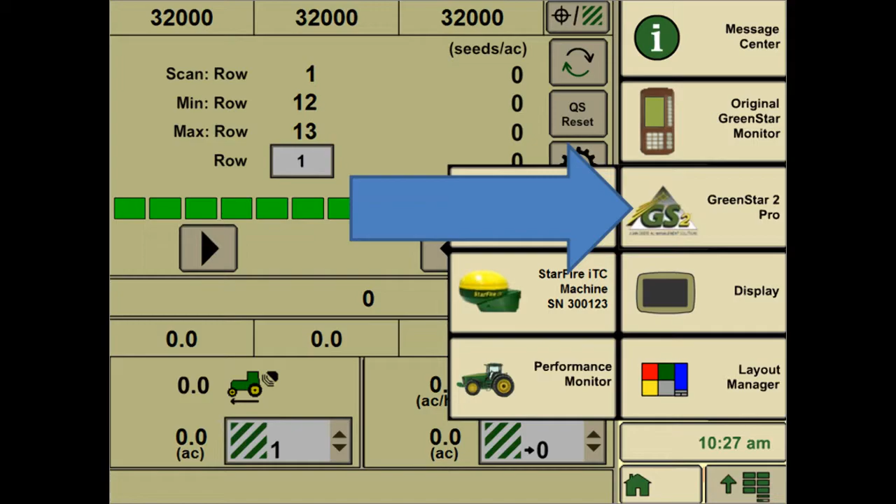Once the TCM calibration is completed, then we can go into the equipment setup, which is going to be going from the main menu into the GS2 or GS3. And then we're going to select the equipment tab on the right hand side. On the left hand side of our screen we can see machine type, model, and name will now appear. We want to make sure that we enter that information in correctly, and it'll also be there for the next time we put this receiver and display back in this machine.

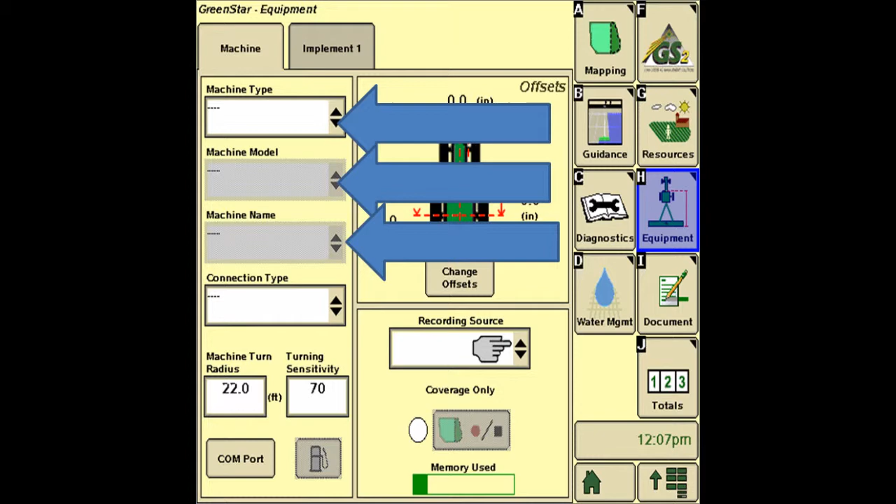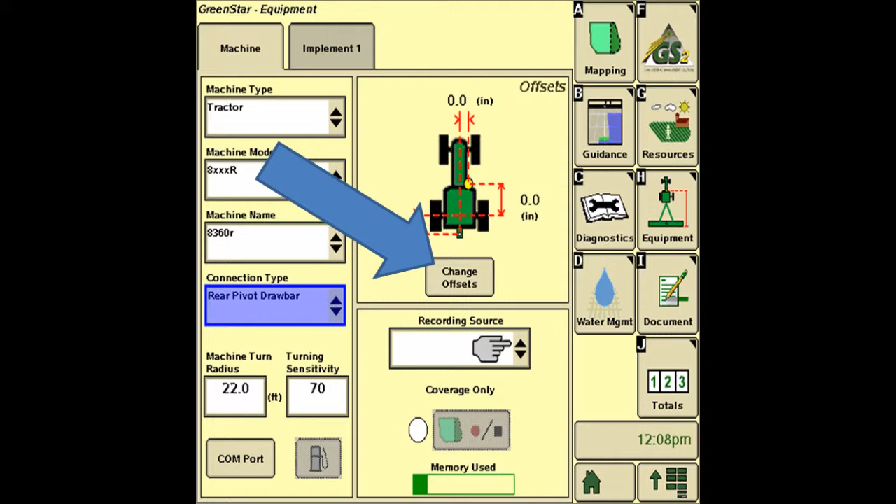We also want to verify that our connection type is going to be representative of the implement that we're going to be hooking onto. If we make changes to the connection type, we'll see our diagram change to represent the option that we selected. Next, if we select the Change Offsets button, it'll bring us into a page that has a diagram of the machine type as well as a diagram of where measurements should be made. They also have description on the bottom that helps illustrate where the measurement should start and end.

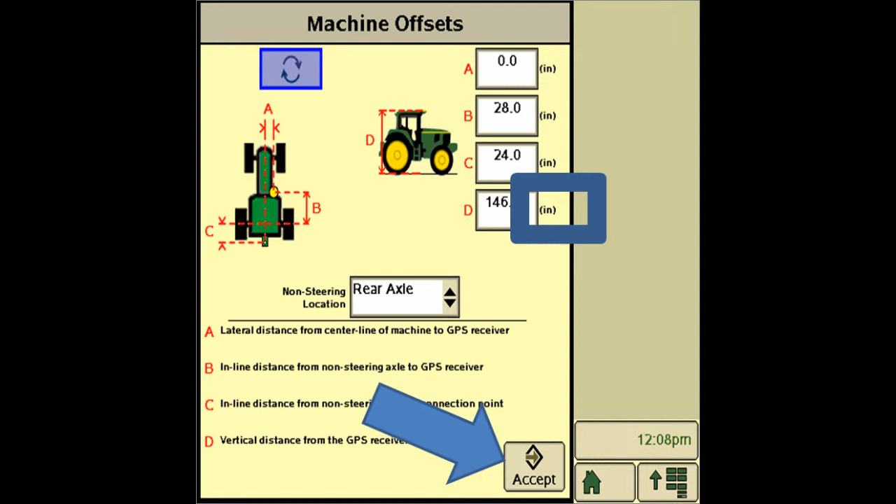One thing to note is that under the machine measurements, it's all going to be in inches, and it'll be different on the implement. We want to make sure that we have the correct units when we're making our measurements. We will also notice that measurement D is going to be the same number that was measured for the TCM calibration. We can then hit accept, and we can now see that those measurements are now put in that picture diagram that's under the machine tab.

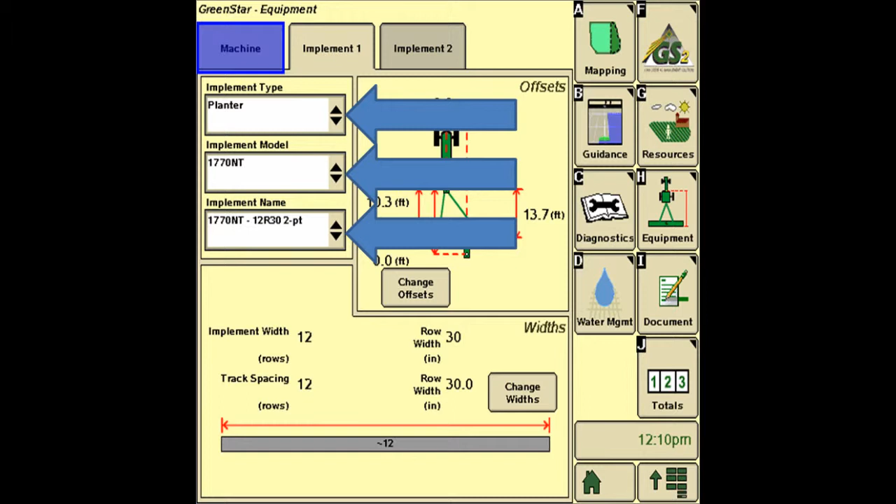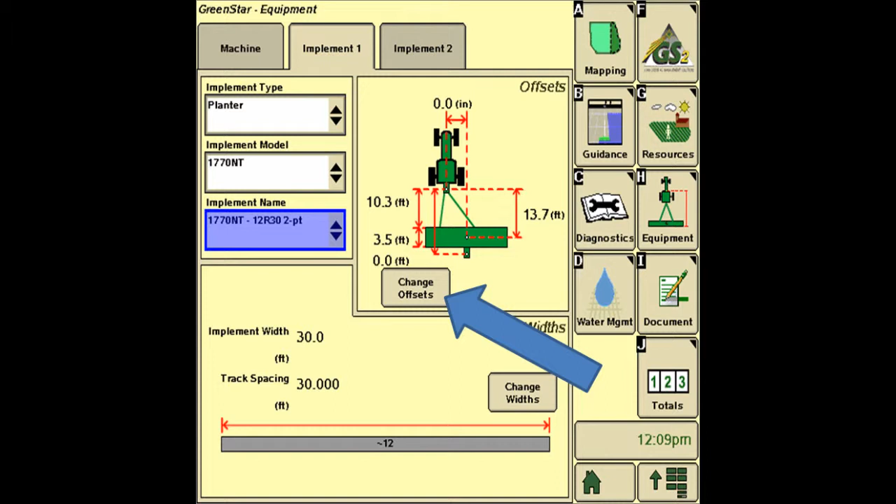Up on top we can now also see that there's an implement tab, and we'll have to follow the same procedure with entering in the implement type, model, and name. As with the machine, we now have a Change Offsets tab that we're going to press to change the measurements for the implement. We can now start taking measurements from the connection point that was measured to on the tractor back to the specific parts of the machine. We also want to note that these measurements are going to be taken in feet.

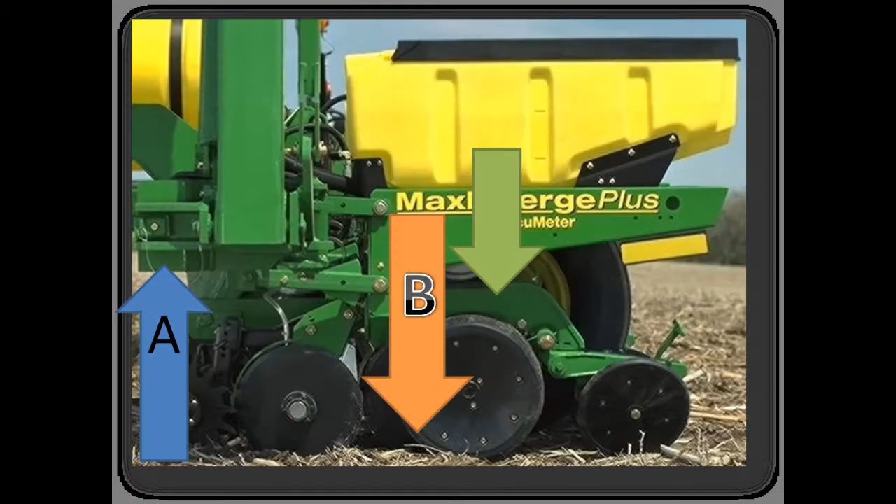To help illustrate those measurement locations, if we're measuring from the connection point back to point A on a planter, it's going to be at the front of the frame, and B measurement is going to be taken from the front of the frame to the point where it's being applied, in this case the seed tubes. Measurement C will be where the green arrow is, and that is the control point for the implement. The display will add the measurements between A and B to determine where that application point is, so it knows when to run swath control.

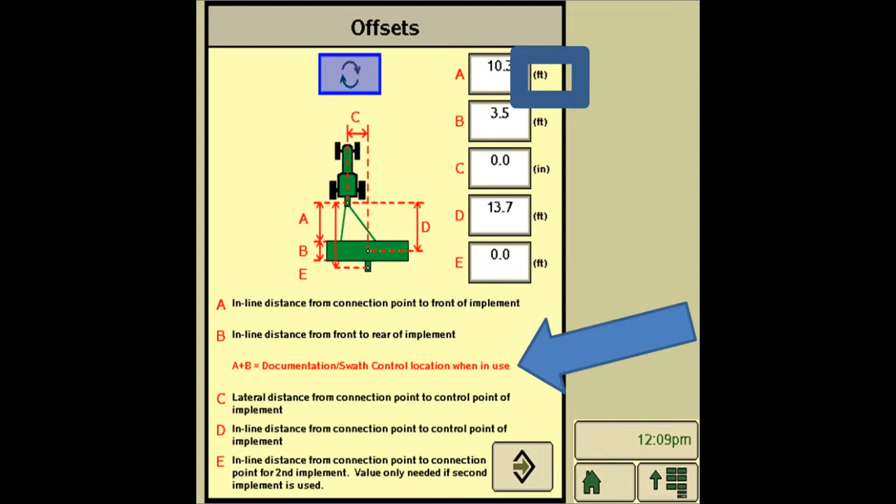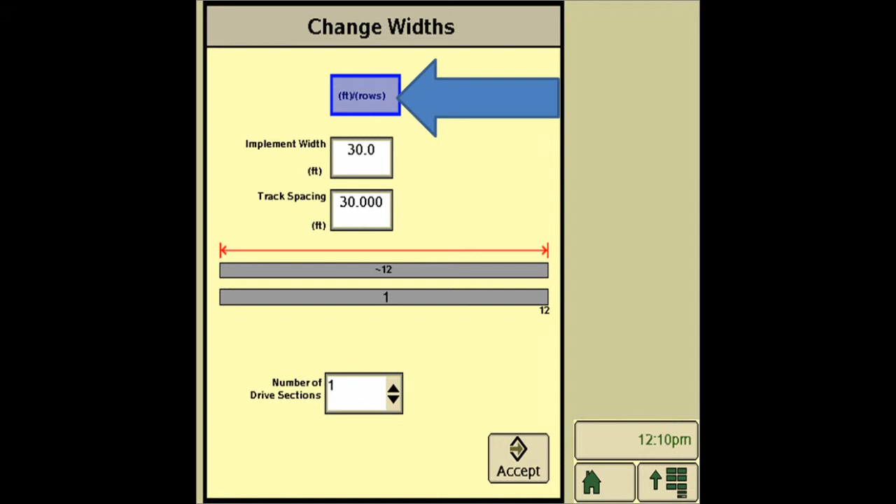We can then hit accept and then go into the Change Widths tab. Here we want to enter in the overall working width of the implement, where we can either enter it in feet, or if we hit the feet and rows button, we can enter it in by how many rows as well as the row width, and it'll do the calculations for us. After hitting accept, we can verify that all the measurements are in fact correct and continue on with other setup procedures.